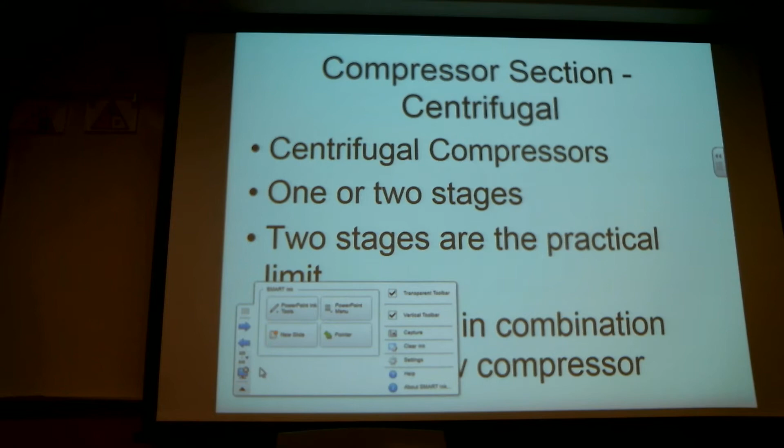Let's do that. Go away, little thing.

Just push it aside and see what it does. Yeah, that's what I'm trying to do. Usually it moves. Oh, there it goes.

All right, so a couple different types or styles of compressors. So what are they? Centrifugals, one, and what's the other one? That's it, all right. And so the practical limit on these things is going to be just two stages.

Now you could make it a 1 stage, 2 of them operating in parallel with each other in tandem. 2 of them operating off the same shaft, both creating pressure, but there's no bump in pressure between one centrifugal wheel and the other wheel. Or you could have them so that they operate in series.

So you could have one increasing the pressure, pushing it into the next one, and then that one boosts the pressure even higher. But two wheels, 2 centrifugal, is going to be kind of the maximum or optimum operating style for centrifugal compressors. Remember I said that the front of the engine starts getting kind of too big and the engine starts getting kind of too long for 2 stages.

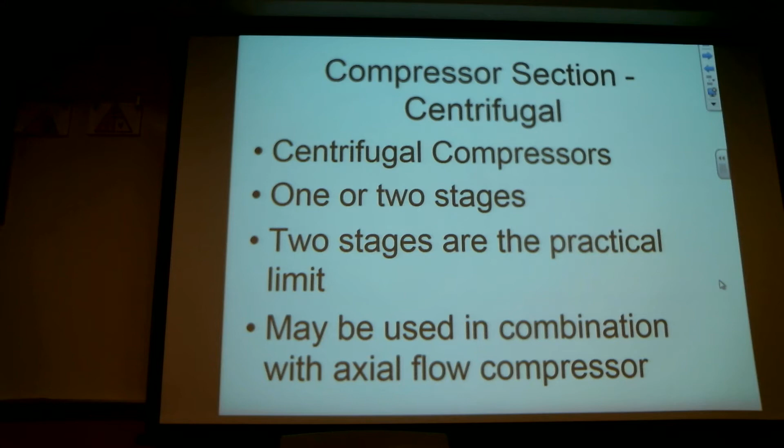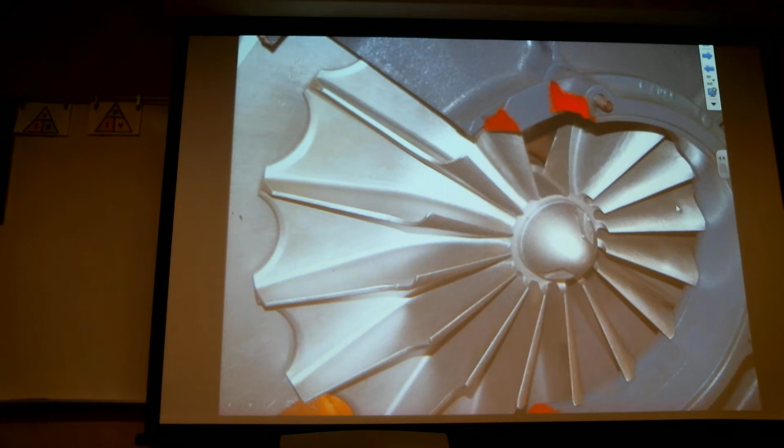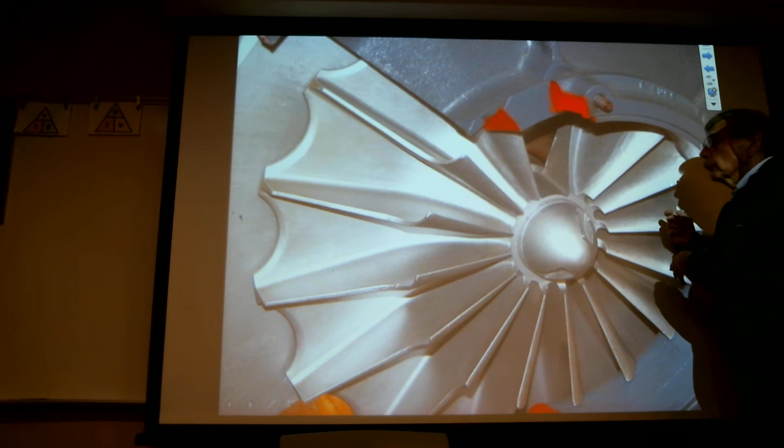Okay, so here's a centrifugal flow compressor. Picks up the air. This thing is being driven mechanically. So it picks up the air at this lip, and it grabs it and throws it down this chute outward. Centrifugal force is what creates the pressure or the velocity in this compressor.

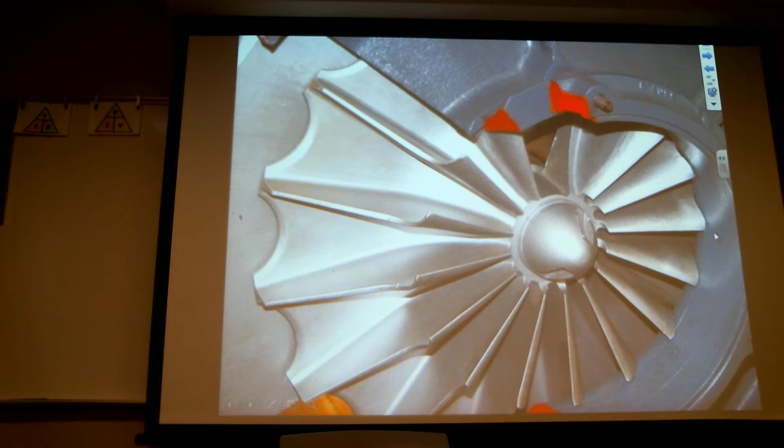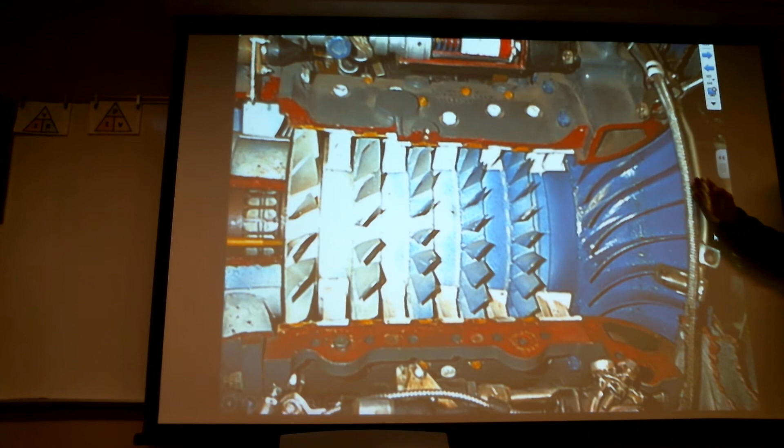When you look at it here, there's some different styles or shapes on these chutes. So it can pick it up here, and it gives it kind of a little swirl as it comes down. And there's some things that happen there, I'll talk about that in just a second. On the lip, the rear lip of this thing here, where it goes into the diffuser. This one here, of course, is known as what kind of compressor? Axial. Axial flow.

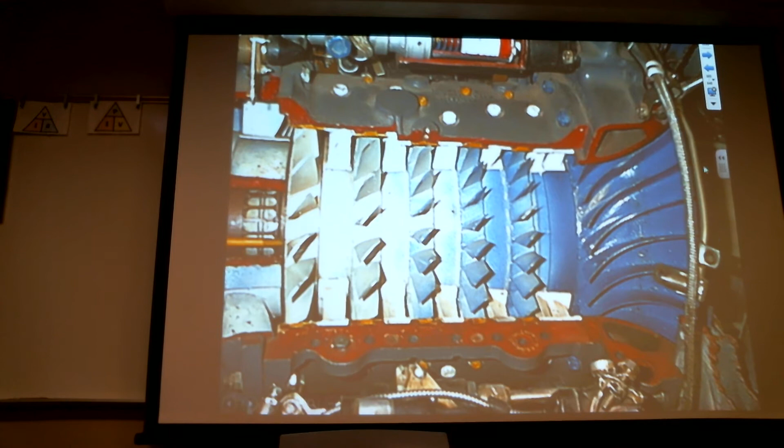Okay, so a single stage of compression with a centrifugal flow is going to be 6 to 1 or 7 to 1, somewhere in that range. So per stage of compression, when you weigh compression of axial versus centrifugal, you get more pressure rise out of the centrifugal compressor. Sorry, that's for a centrifugal, the 6 to 1 to 7 to 1? Yes. Okay. Yeah.

You're going to talk about what inducers are? What's that? Colors? Say again. You're going to talk about what inducers are? Same thing. Okay. Yeah, so there are parts. Different name. There are parts to this compressor stage, and so the impeller is the part that turns. So centrifugal compressor refers to the housing that it's in also.

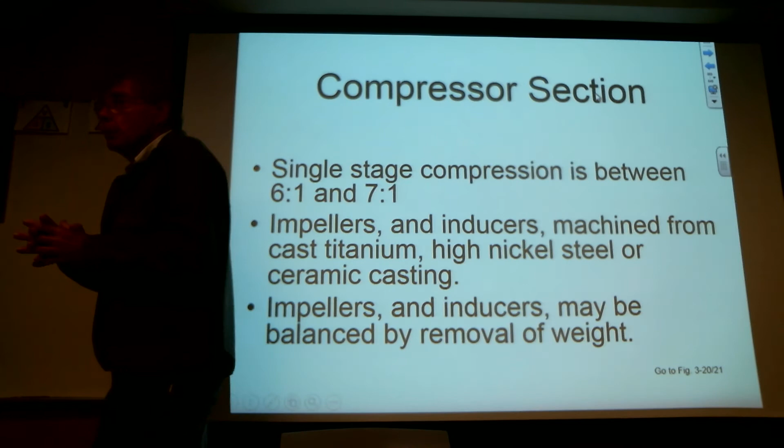They make them out of titanium because they get so hot. Is the reason why they're making them out of titanium because of heat? Well, for strength, because these things are running so fast, they have to be pretty strong. And they're pretty big units. So when they start getting big, you want to make them light too. So it has to be strong and light as well.

Ceramic, because it's easy to make. They just pour it into a mold. And they come back, they do a little bit of machine work on it.

The single stage, is there a centrifugal engine that's just a single stage? Is that enough compression to run an engine? Yeah, it is. But you have to run a lot of air through it, so they get to be pretty big monsters to create enough pressure. Could you explain the 6 to 1 compression, like for every? Sure, for every this much that goes into it, it gets compressed 6 times. Okay, thank you.

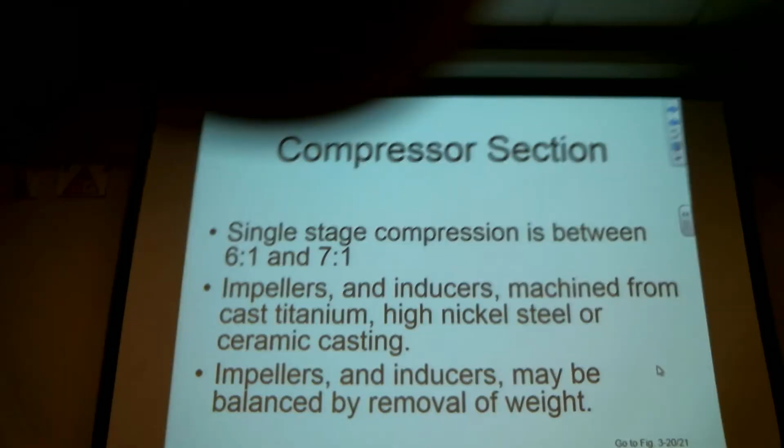Now, impellers, also known as inducers, they can balance these by weight removal. You're going to see this when you get to your turbine section. So what they'll do is they'll take a ring that's molded into or cut into the rotor, and they'll grind metal off of that ring to balance it. So these things have dense spots in them. They're made out of big chunks of steel and they're machined down, but you end up with different densities in them. So you might end up with heavy spots and light spots that have to be balanced because these things turn pretty quick, and if you have it out of balance, you're going to end up with a vibration. You want to minimize the vibration as much as possible. So once you get into your turbines, probably next week, you're going to see that. I'll maybe point that out for you.

All right, so the diffuser or the compressor manifold, this is all part of the centrifugal compressor. It's usually cast aluminum, might have some stainless steel parts in it for abrasion resistance. Remember, you're forcing air through this thing. When you force air through it, you also force dust and dirt and everything else through it, so that is an abrasive, and as that abrasive goes through an aluminum housing, that housing is going to wear.

Okay, so the air is going to enter in the center at that lip. The centrifugal force is going to accelerate that air. Through that acceleration, it's going to move outward from the center, from the rotational axis of that impeller. So what we're doing is we're pumping the air at a high velocity using this mechanically driven impeller.

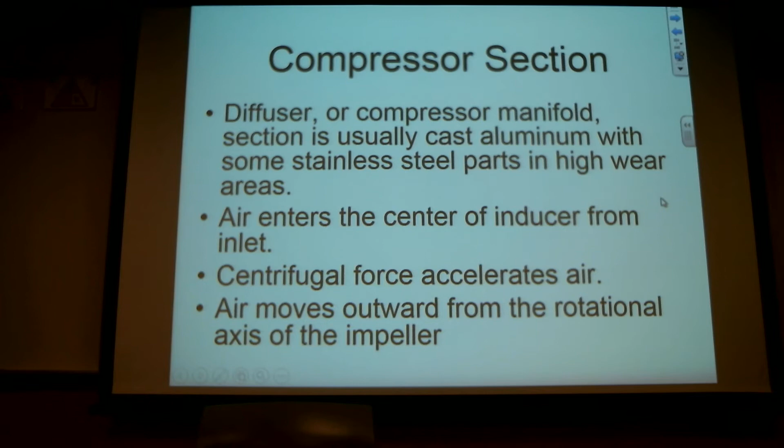And then air comes off the lip. It's ejected at the rim. That's called the exducer, the part where the air comes off the wheel, and it blows it into the diffuser. The diffuser is just a big ring, like a big hollow donut. And this air is being thrown into that hollow donut.

And when it comes off of the wheel, it's running at a pretty high rate of speed, but all of a sudden it finds itself in an area, just a big opening, a big void that we're forcing this air into. So what happens to the pressure in there? What kind of a duct is that? Diverging, a diverging duct. And so the pressure does what? Goes up, pressure jumps up.

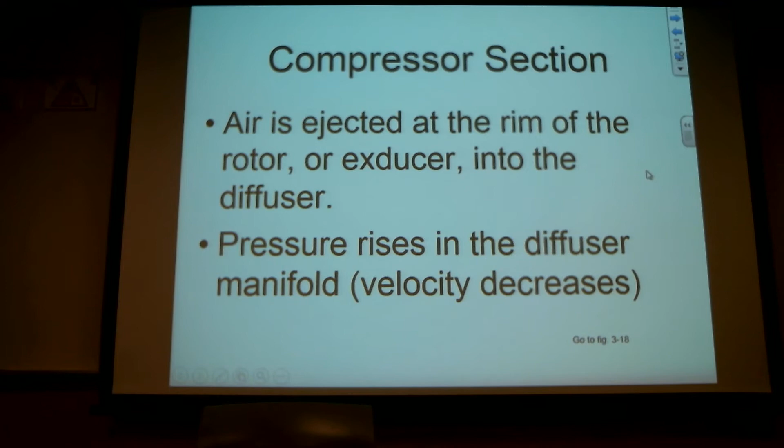Now, some impellers are going to have what they call a reverse lip on them, and what that does is just let the air slide off of the end of the wheel a little bit easier.

There's a shock wave that's created when the air starts moving too fast at the edge of the wheel. The wheel dumps the air out, and then the next blade comes by and slices through what was just thrown off the wheel. But when it does that, it creates a shearing action in the air, and there's a shock wave that slows down the air, but it also causes it to try to stay on the wheel. It doesn't want to go into that high pressure zone or into that diverging duct.

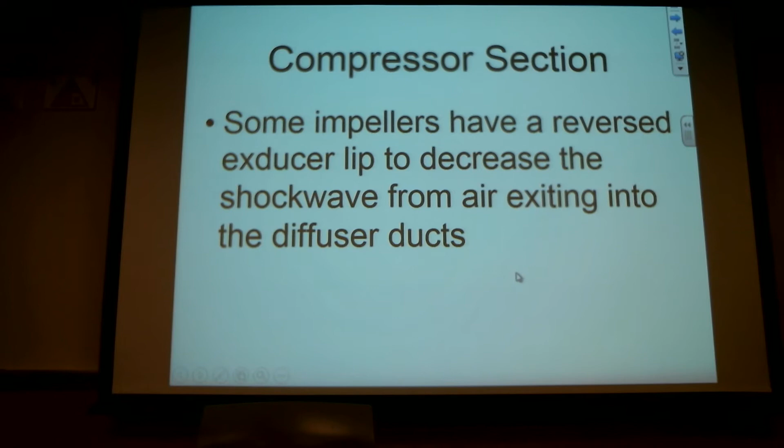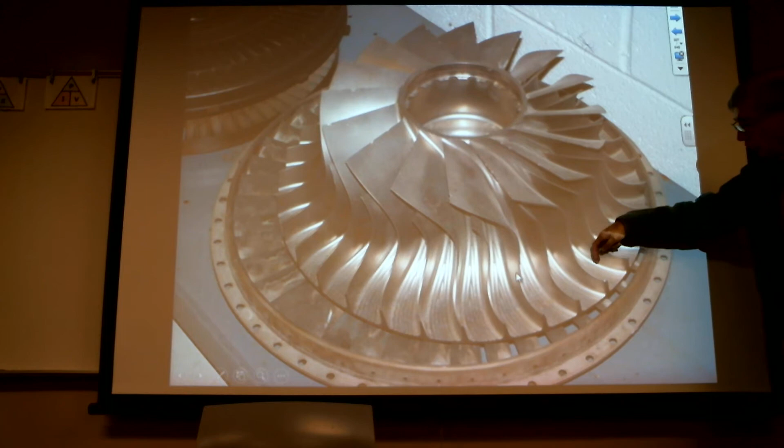Now some of these that you've seen just have a straight chute that comes straight down the side here, and that just pushes the air, it comes off the back, but then that next vane comes by and whacks that air and causes a pressure wave to occur there. And it tries to, if this thing is turning so fast, what happens is it tries to hold it in that chute, doesn't allow it to slide out of there real easy.

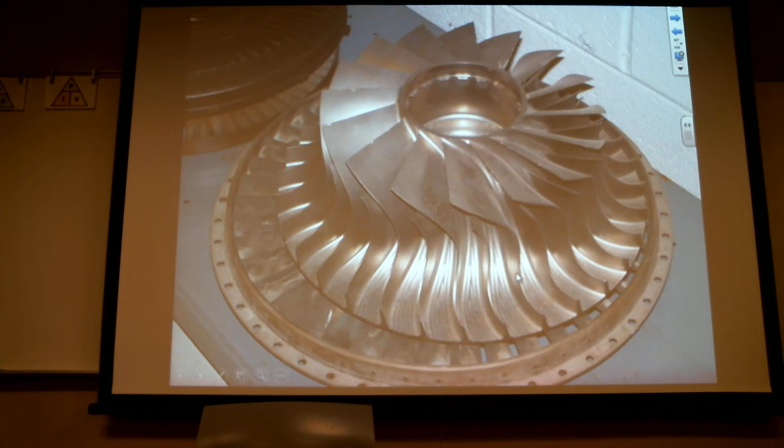So axial flow. Anybody have a question about centrifugal flow compressors? So centrifugal flow compressors do get blended. They go in there and just grind a little metal off, but if you start grinding too much metal off, you'll lose the clearance between the housing and the wheel, and then you'll lose the efficiency on the compressor. Now these things are pretty strong because they're built so heavy. There isn't much that usually happens to them, so you don't have to worry about that so much. But know that they can be damaged by debris going through the engine.

Okay, so axial flow compressors. From one stage to the next, there's going to be a continual rise in air pressure.

There's going to be a continual rise in pressure, and with that rise in pressure comes a rise in temperature. That's what we're looking for. But throughout the compressor, if you look at that graph I gave you early on, there's a minimal rise in air velocity from stage 1 to stage 13, 14, 15, however many stages there are. So this thing, we're looking for a rise in pressure out of this compressor, not a rise in velocity.

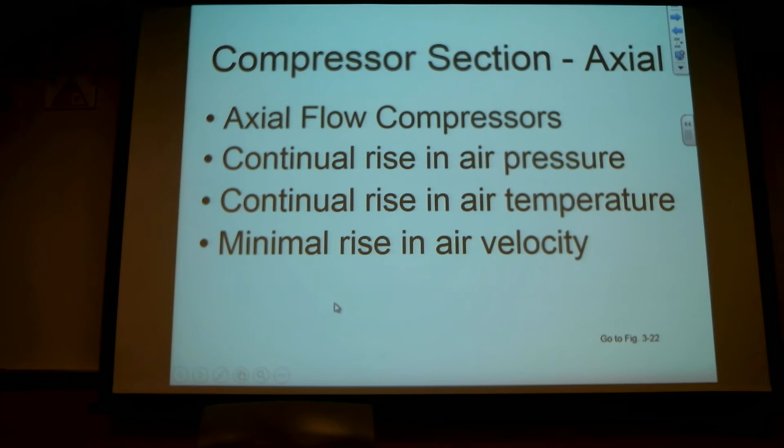Doing a compressor wash, like flushing Turco or whatever, is that pretty standard? Yeah, pretty common, it kind of depends. Turco's a soap, a company that makes soaps. Using a soap, or just water, or soap and water, is a very common thing.

Incredibly common. You know when you go get your car washed, and two days later it's got a film all over it, dirt from being in the city. Well, because these things consume so much air, it multiplies that effect. You drive down the freeway, and if you look at the leading edge of everything on your car, run your hand up your radio antenna, it comes back with a brown streak on it. The same thing happens on a turbine engine because of the immense amount of air they digest, so that stuff builds up faster and faster inside an engine. Anything you do to change the airfoil shape degrades the performance of the engine. So washing an engine is a huge deal, especially in dirty climates.

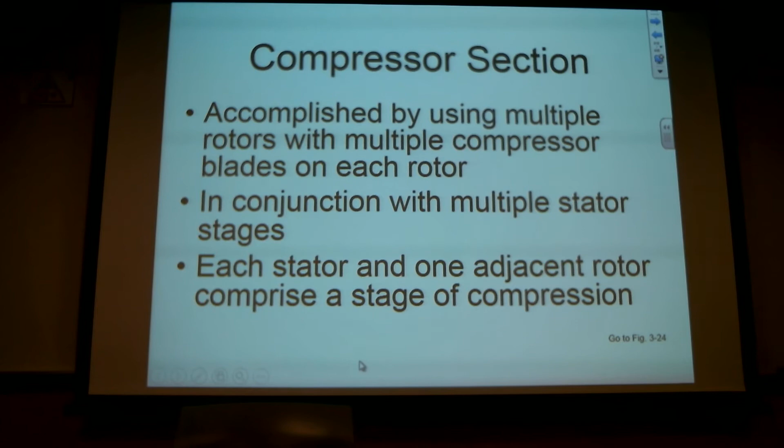One more time, what's that? Can you say it one more time? Sure, bottom line on the slide, for you. One rotor and one stator is going to comprise a single stage.

So what's going to happen here? You should get this one because this is pretty darn important, this is how the whole thing works. You're going to have a moving blade, the rotor blade, compressor blade, has a number of different names for it, and it's going to act like a wing. Now the air isn't moving so much over the wing because the wing is moving through the air, and when it does, it's going to raise the velocity. So you move a wing through the air, what happens to the airflow in flight on a wing, an aircraft wing? It goes faster, the air velocity is going to increase, and the pressure on one side of it is going to decrease. So anytime you increase the velocity, you're going to decrease the pressure.

Just think of this as a whole bunch of Cessna 150 wings tied to a wheel. Then you're going to have a stator, and that air, now that it's starting to move fast across those compressor blades, is starting to move through the engine. When it goes between the stator blades, stator vanes, they're built so that the stator vanes act as a diverging duct. So when that high velocity air goes between the stator blades, through a diverging duct, what happens to the pressure? It goes up, the temperature goes up, and the velocity goes down. Exactly right.

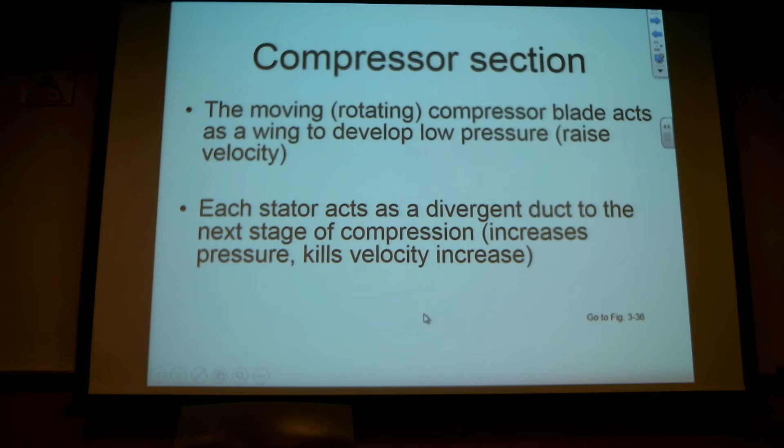When this happens stage after stage after stage, it's known as a cascade effect. You've seen an avalanche before, haven't you? Seen pictures of one? I hope you've never been in one. It starts off with maybe a little bit of snow sliding down a hill, then it breaks something else loose, and then something else, and pretty soon the whole side of the mountain's falling down. That's kind of what happens here - one air molecule moves another one, moves another one, and pretty soon you've got a bunch of molecules all moving through the engine. Cascade effect.

Now this doesn't work so good with a centrifugal compressor because we only have a couple stages. But where it really works is with an axial compressor, stage after stage after stage. That's why these axial compressors on bigger engines have about 13, 14, 15 stages of compression. On smaller engines, you can get away with 5 or 6, especially if you have a centrifugal compressor to absorb everything the axial compressor has done and then bump it up again.

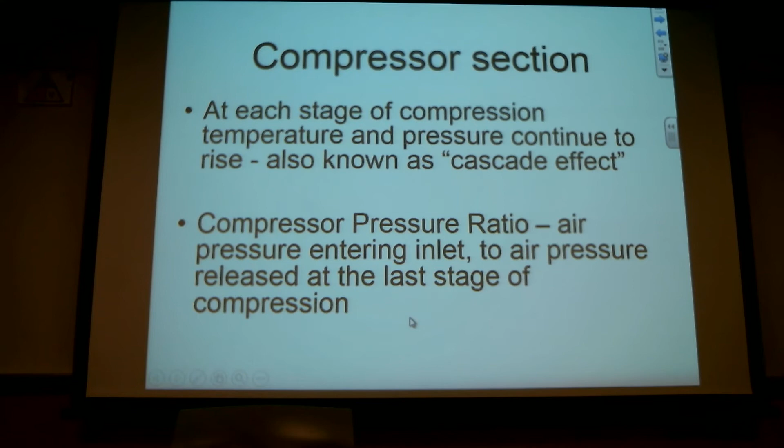Okay, so at each successive stage, the blades and vanes are placed closer and closer together. As we squeeze the air down, we don't need so much space between the blades and vanes. We're compressing that air, so it doesn't have to move 2 inches, then another 2 inches, then another 2 inches. You start with 2 inches, but as you compress the air, that volume of air gets smaller and smaller as it goes further back through the engine.

Now early on, they built compressor blades out of aluminum. They worked okay, but they started vibrating and shaking, and then they'd digest one or two, and next thing you know you didn't have a compressor anymore. So now, more modern engines with better metallurgy use fewer stages. They use longer blades. You still get shorter and closer together as you go further back, but you can do it with larger blades - they're stronger - so you end up with fewer stages of compression.

And when you end up with fewer stages of compression, what happens to the size of the engine? It starts to shrink a little bit, right? Now the weight of the engine may not change a whole lot, but it's going to make a more compact engine. So when you're driving that engine through the air, you don't have such a big engine to push through the air. It might even weigh a little bit less. So now you're shipping less equipment around, and you do it with a little bit better fuel efficiency.

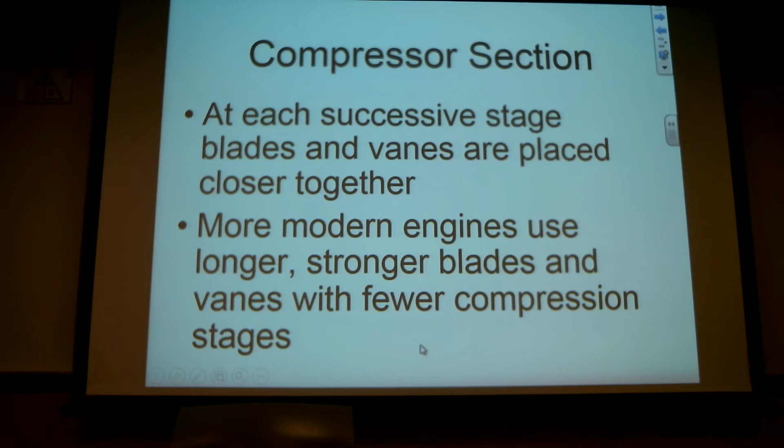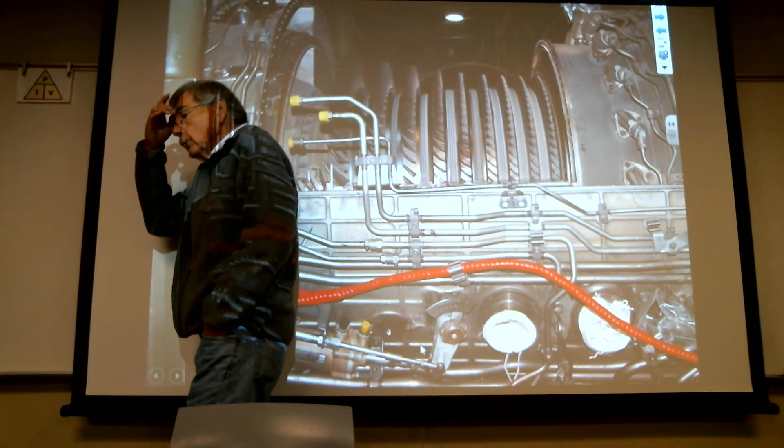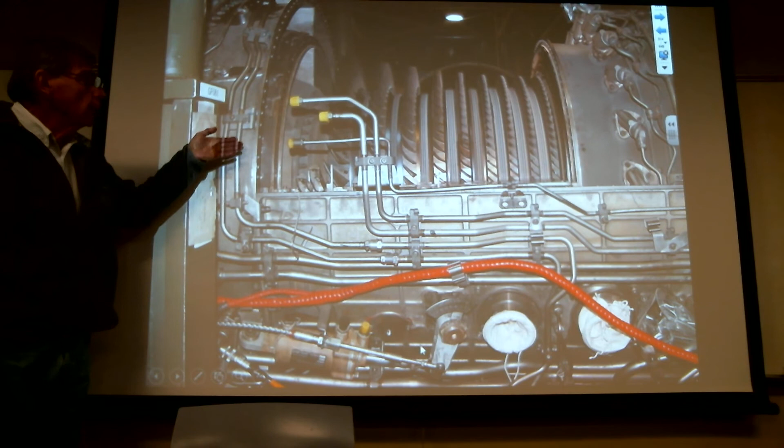A lot of times they call this the booster, the first stage, because it's the one that really gets the air moving into the compressor. It really gives it a leg up and gets it going. If you have an engine with a big fan up here, the fan is primarily used to drive the aircraft through the air. It's a multi-bladed propeller. But the booster is the one that's going to actually start driving the air into the compressor and get it moving.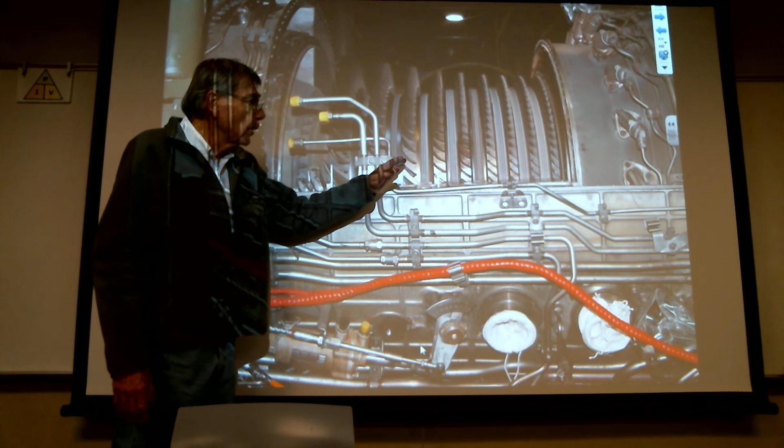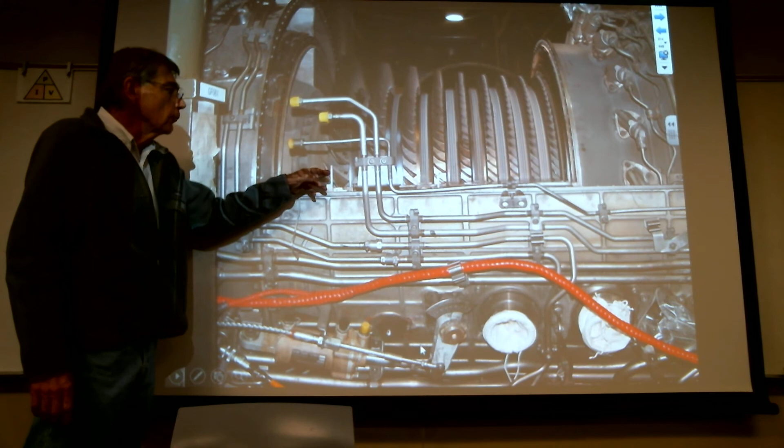The other thing that happens is when you have a big fan, it tends to exclude some air from the core of the engine just a little bit. It will drive air in, but not as well as if it was just exposed to the front of the aircraft, just the boosters. So these are the boosters that kind of start to accelerate. The first stage may well be known as a booster.

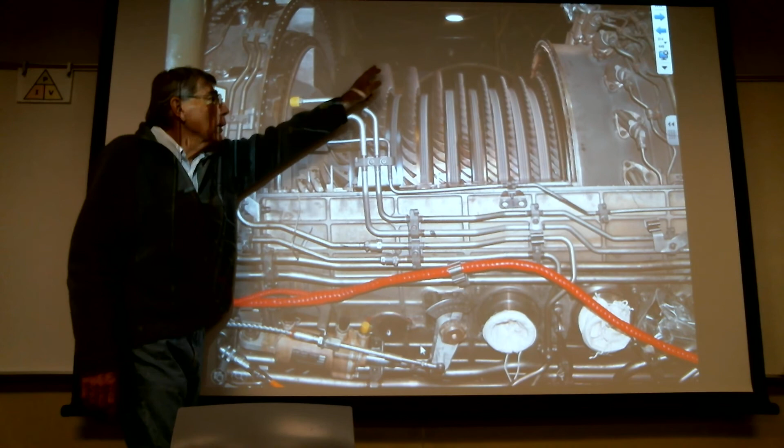But here, what I want you to really see is the size of these, and how the length gets shorter. You get to have more blades. The blades get shorter, and they start getting packed closer together. There's more angle of attack as well, a little more the further back you go.

I'm just curious with the blades, when you go back further, is it like, from an engineering point of view, does it get like two-thirds smaller every time, or you know what I mean?

I'm sure there's some proportion and ratio to it, and every engine you'll look at will look different than some other engine, stage for stage. But that also is a function of the diameter and the height of the blades. That's not anything we end up getting mixed up with. It's something engineering people deal with—a lot of it's trial and error, but over the years they've figured out what proportions work and what doesn't. Because you're still dealing with air—here we are 50, 60 years on making turbine engines, but we're still dealing with the same fluid to work with.

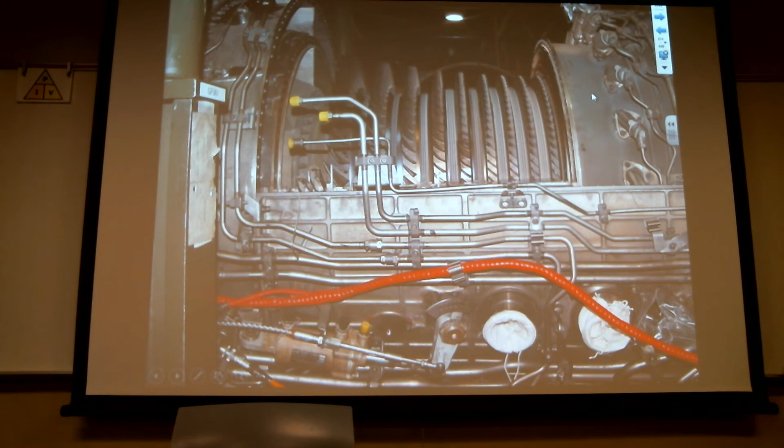Okay, so axial flows have some problems—there's good and bad. So you kill one blade, you kill them all. Even a little piece of something, a clipping off a cotter pin or a piece of safety wire going through the engine, is going to degrade it noticeably.

Also, they move so much air that not only do they get dirty, but they also get abraded, and the chord begins to wear on them. As the chord wears, you don't have as much efficiency on the blade. The air doesn't accelerate across the surface as much because it isn't as long, so you end up losing a little bit of efficiency. So if an engine is operated in a dirty environment where it sucks up a lot of dirt, it's going to act like sandpaper in there and degrade the blades, and it can significantly degrade the performance of the engine.

How often is it required to be inspected? Usually what they do is time them—at a certain time limit and under certain conditions, because aircraft get used in so many different places. But generally speaking, you can't really check.

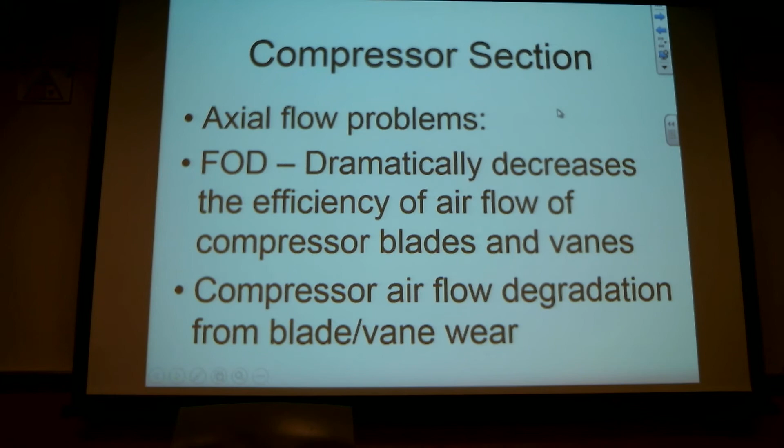Water methanol injection for takeoff, when required, does noticeably affect blade life. Well, they inject the water, but they don't inject it in front of the compressor - they put it in the back, right before it goes to the combustion section, not in the turbine. So the blades don't actually run in any kind of liquid. Okay, that makes more sense.

So compressor stalls, here's something you should know about. Throughout the compressor, the pressure builds, but it's not a linear build - like the cascade effect I was telling you about. It starts out, then builds very quickly the further back you go through the compressor. So it's not linear, but you still have to have a nice, smooth pressure build throughout the compressor.

This is known as surging - the compressor pushing the air the wrong way because of uneven compressor pressure ratios. With an ideal compressor pressure ratio, it's a nice smooth build of pressure all the way through the compressor, from stage to stage, just builds a nice smooth pressure curve.

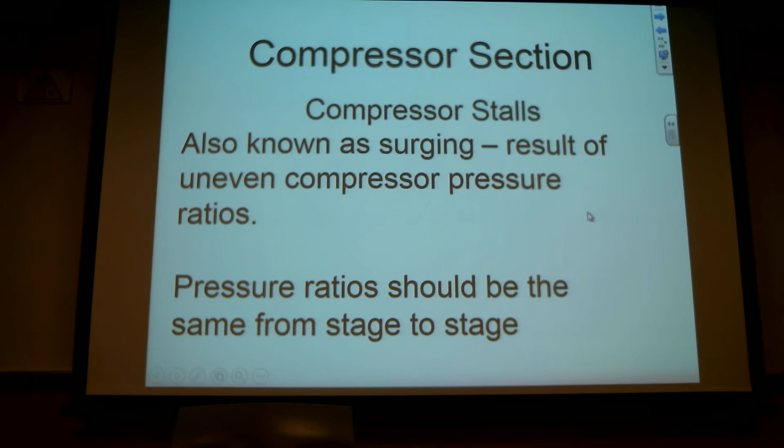So there's some different types of stalls. There's choking stalls. Choking stalls occur at low speeds, lower engine RPM. This is going to cause a lower compression at the rear of the compressor, which lowers the overall volume of air that goes through the engine.

Well, you can imagine - the combustion section, most of you are ready for a checkout on that now. If you add the fuel and the engine isn't moving enough volume of air through it, and the fuel lights in the combustor, where's it going to try to go? Back into the engine, back out the front - well, some will go out the back too. It's just looking for a way out. So we use the compressor to create a pressure wall to keep the combustion in the combustion section. It's just air - that's the only thing that holds that fire in the combustion section.

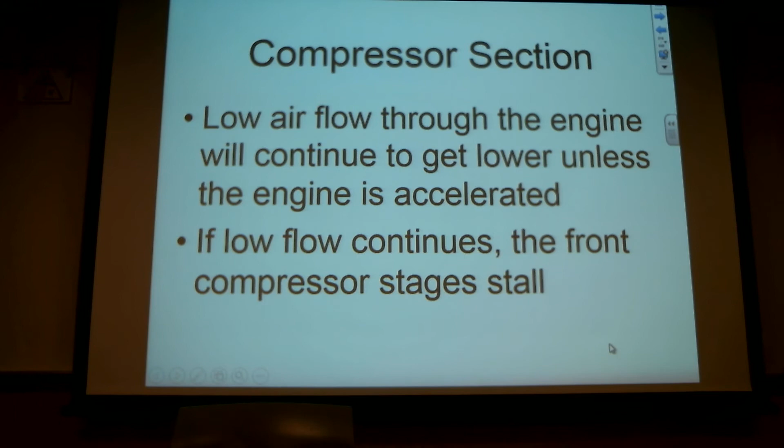So if the speed of the engine is too slow, when we light the combustor, it's going to run right out the front and the back and anywhere it can. It's called a choking stall. Now because it's doing that, is the engine going to accelerate? No, because you're not going to generate enough heat to drive the turbine, which turns the compressor. So it's going to find a stagnant, steady state. If this low flow persists, it's just going to continue to cause the airflow at the front to become less and less. The engine won't accelerate, and that fire is going to come out the front of the engine.

So what's a good RPM to go by? Is that based on the engine typically on a start? There's a couple other things that can enter into this. We'll talk about those in a second.

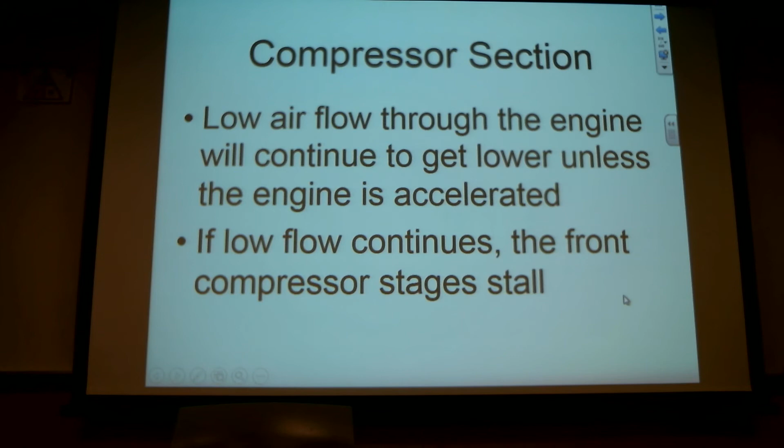Now there's some other things that can help cause this, and that is low compression because you have air density changes from temperature or altitude at the front of the compressor. So you descend into dry air - it can also cause this problem on an engine that's running. You'd be surprised, just descending through a layer of moist air into a layer of dry air, or vice versa, can cause engine stall problems while the engine is at idle. It'll change the density of the air inside the engine so rapidly, the engine won't be able to accommodate it. Now, something can be done in that case - you can actually accelerate the engine slightly because you already have compressibility of the air in front of the engine from the aircraft speed. When you're sitting on the ground, you don't have that option.

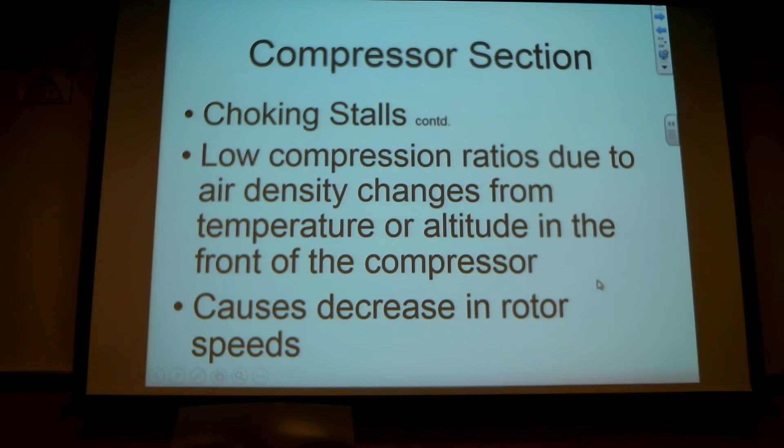Okay, so there's something else. Too much pressure in the rear of the compressor is going to impede flow through the compressor. So all of a sudden you have too much pressure at the back of the compressor. What would be something that could cause the airflow to become temporarily obstructed in the front of the compressor? If you impede the airflow into the compressor, and then that something disappears and the airflow becomes unrestricted again, the compressor picks it up again - what's going to happen is that air flows through the compressor. That all happens pretty quick.

Pulse. It's going to be like a pulse going through the engine. Exactly right. So what would cause that? A bird strike. Yeah, bird strike. So it'll grind a bird up, but a bird will momentarily disrupt the airflow through the compressor.

So if you have low flow at the front of the compressor, too high air pressure in the back of the compressor, it creates an unstable flow of pressure throughout the compressor.

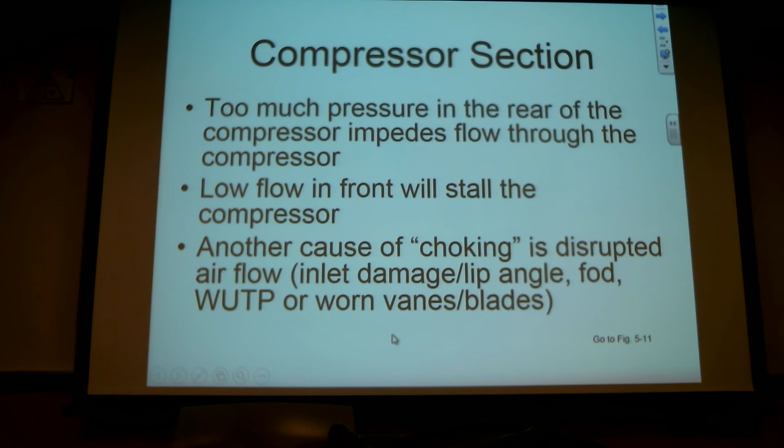There's another kind of stall called an acceleration stall. When the engines are tested, they come out of overhaul, they do what they call snap accels. Those snap accels are meant to check and see how fast the engine will accelerate with the throttle lever angle, the TLA, at 0, and pushed all the way forward. How fast will the engine accelerate? There's two things they're looking for: the time to power, and making sure the engine doesn't stall during that climb to 100% power.

If you increase the airflow too quickly throughout the engine, it degrades the angle of attack - it increases the angle of attack, has that effect. And so you start screwing with the pressure zones around the blades.

So aircraft wing, flying along, everything's nice, everybody's fat, dumb, and happy, everybody's quiet with their earbuds in. And so you increase the angle of attack, you increase the climb. And oh my gosh, here comes a hill - we got to get over that hill. So you pull back, pull back, pull back.

What happens to the airflow over the wing as you get to a point where the wing is no longer creating lift? What is happening to that wing? Why does it lose lift? Turbulence on top - the airflow separates from the top of the wing, and you stall. And then what also happens to that wing? It ceases to generate lift.

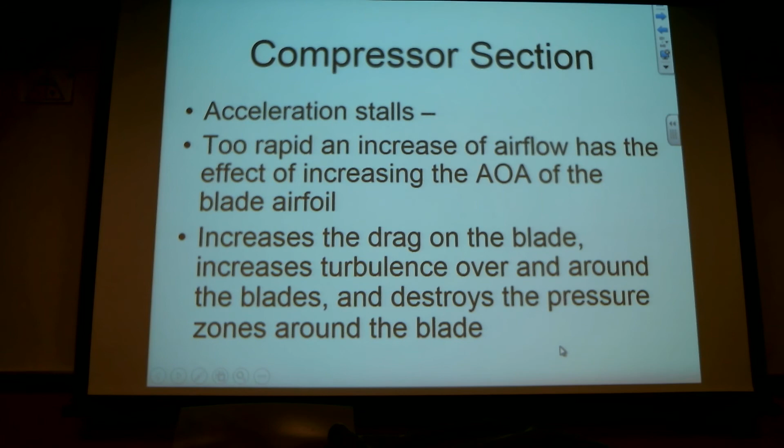So the turbulence is going to lower the compression and the airflow. And anything you do that lowers that pressure - you've got a bubble of low pressure air going through there, you've got high pressure in the combustor, and all of a sudden you've got this low pressure bubble floating through this thing. You're going to hear, at the very minimum, a bump or a thump coming out of the engine, because that's the compression, the combustion gas trying to come forward.

And you might even see fire come out the front of the engine.

I would imagine most passengers don't like seeing that. Passengers, they hate to see that. Yeah, they hate to see that. Yes, it makes them all sweaty, nervous. They stain the seats.

I think I got a little picture of this.

The engine's running along nice and happy, and all of a sudden it has too much air. You just killed the compression at the front of the engine. It'll eventually catch up - it doesn't blow the engine up.

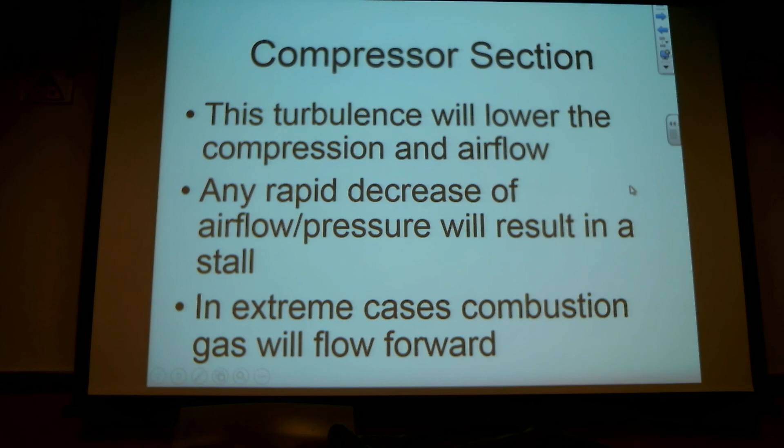All right, I'm going to show you this. Now this is on a C-17 in Australia, at an air show. C-17 - it's a big cargo plane. One of its features is it's built to land on unimproved runways, dirt strips that will support the weight, so they can land these things just about anywhere, and then they back them into parking using the reversers, backing the whole airplane up. Let me show you this, and then I'll explain it also.

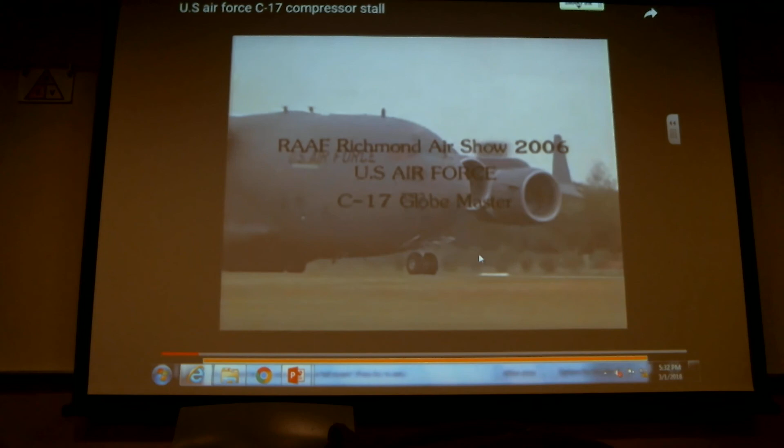This runs on a loop, so watch for the fire coming out of the thrust reverser. Did you see that? That little flash there? Okay, that was a compressor stall.

Well, how they back this up is they use the thrust reversers. So let me run that again. You'll also notice the vortexes at the inlets - those things are a long way off the ground, but you can see they're sucking a lot of air into the engine. That's causing a pressure drop, and when it causes that pressure drop, the moisture comes out of the air. Do that again.

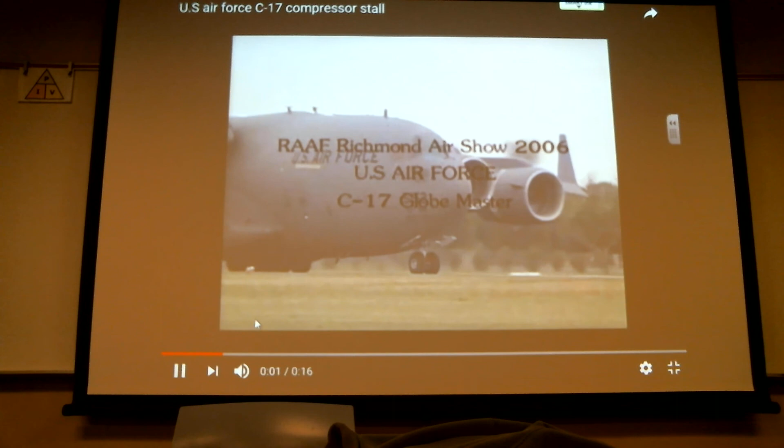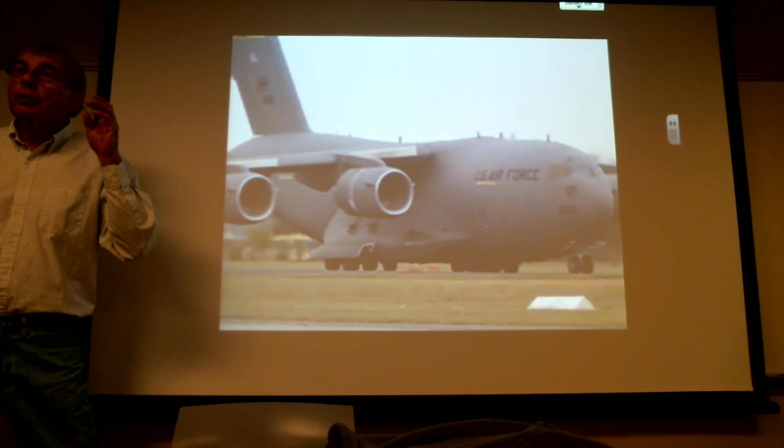Now, they use the thrust reversers, and the thrust reversers are blowing the air across the front of the inlet. That all of a sudden is going to drop the air pressure at the inlet. You see that? So what we've done is we've knocked that air pressure down at the inlet, and that engine that's running... oh, I didn't want that.

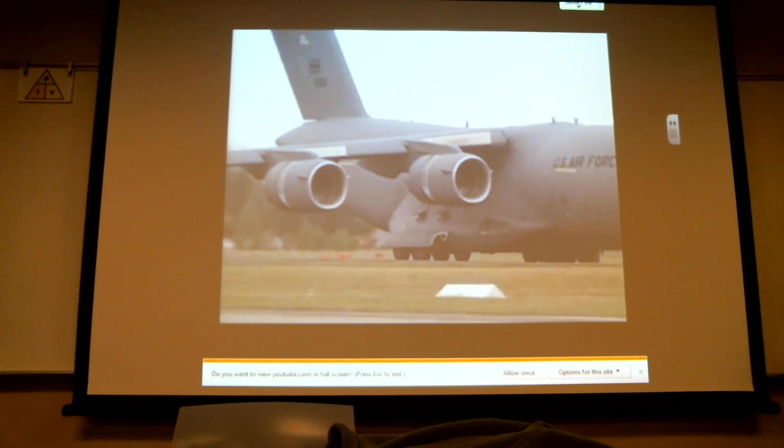As soon as you lower the pressure in the front of that thing, now you have the compressor causing you problems, right? You have that engine running at pretty high speed. The compressors on these things, when the thrust reverser is deployed, only run at about 70% of the speed of the engine, because they don't want too much power generated with the air going through it the wrong way. The reason you didn't see the fire come out the front of the engine is because the thrust reverser blocks that air coming into the front. So the fire was going up, hit the thrust reverser, and came out the back of it. That's why you didn't see it coming out the front.

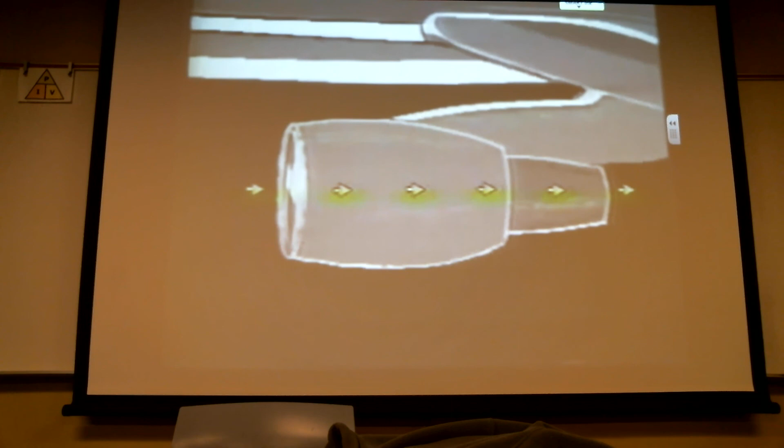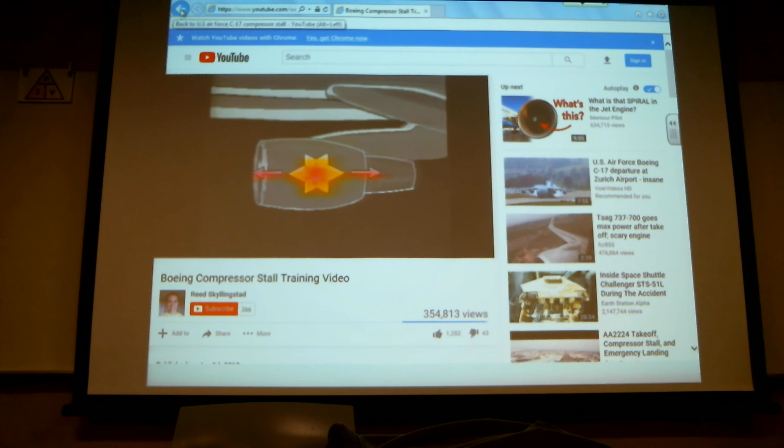Yeah, we don't want this. It was like VHS or something. So what was those little... show you one more time.

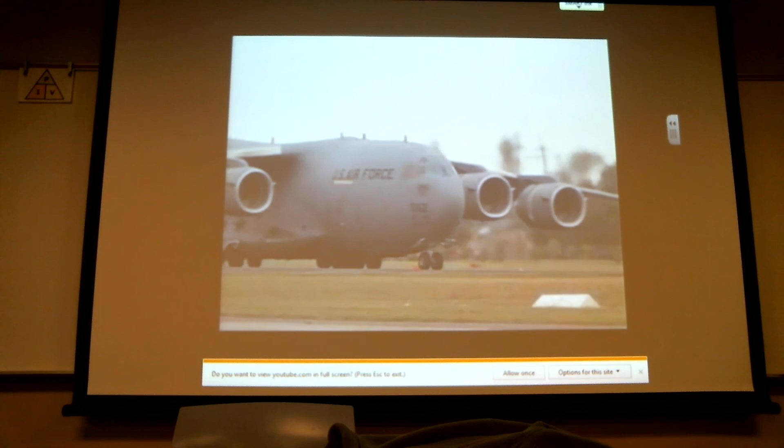So what was the little white thing that came out? A vortex? Yeah, that little vortex is a low pressure zone, because the air is being drawn up into the engine. And it's a pretty warm, humid day. So what happens is the moisture, as you lower the pressure, condenses out. It's like your Slurpee cup - lower the temperature, what happens to the moisture? Condensation, right? Yeah, exactly right.

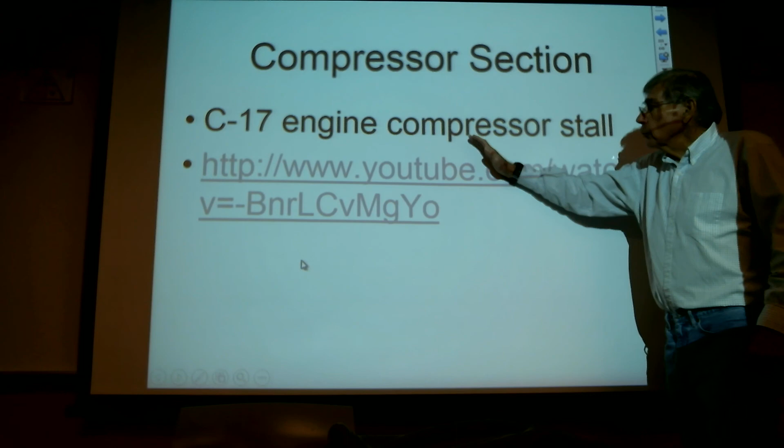Okay, so just know that this stuff can be pretty detrimental to an engine. Quite a number of years ago, I think I told you this once when we were talking about inlets, they were doing some flight testing up at McDonnell Douglas in LA. They changed the configuration of the inlet because it was kind of too close to the ground for some operators. So what they do is take off, nice easy climb, and all of a sudden pull the nose up on it. Well, when they did, because airplanes don't go straight through the sky, although they may look like it, they kind of go at an angle through the sky. And when it did, the air spilled over the inlet lip, and that created turbulence in the inlet, which lowered the air pressure in the front of the engine. And when it lowered the air pressure in the front of the engine, what happened to the compressor air?

Lost it. Yeah, too much air, high pressure air in the back of the compressor, which is absorbed by the combustion chamber. All of a sudden it was low pressure in there. Where did the combustion gas go? Okay, so this thing pounded - it sounded. I was in my hotel room, the windows started shaking. Kaboom, kaboom, kaboom, about 5 times. It shook the windows, it was so loud. Of course, we were right on the airport. People were calling the cops, figuring it was 9/11 all over again.

So something that's kind of out of the ordinary - they went back and redesigned the inlet, and it was fine. But know that something like that, pulling the airplane up too quick... of course there was nobody on the airplane, and the airplane was going like hell. But just that air spilling over the inlet lip caused that compressor stall to occur. Now this will happen on aircraft used for cargo - a lot of times they'll fly them around empty, and the crew will complain of compressor stall, maybe on all 4 engines or all 3 engines. The reason for that is because they get a little too spiffy and pull it up too quick. The airplane accelerates rapidly - it's kind of like flying a sports car all of a sudden instead of a heavy transport. When they do that, that's when it will occur on those inlets.